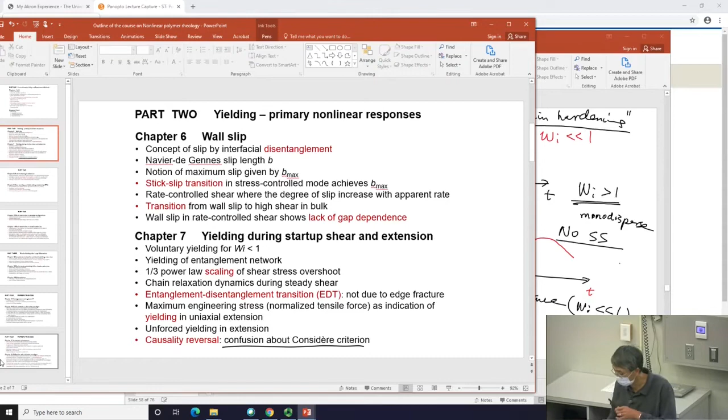So I prepared an outline. If you look at the outline, we finished chapter 7, and we're on chapter 8. There is a section on 7 that I have not spoken about last time, and I should say something about it before, as part of the discussion of extension. And then on chapter 8, we are basically dealing with strain hardening. And today I will speak a little more about the topics of geometrical condensation. In fact, I found a little, or if not little, quite a serious error in the book as I prepared for this part.

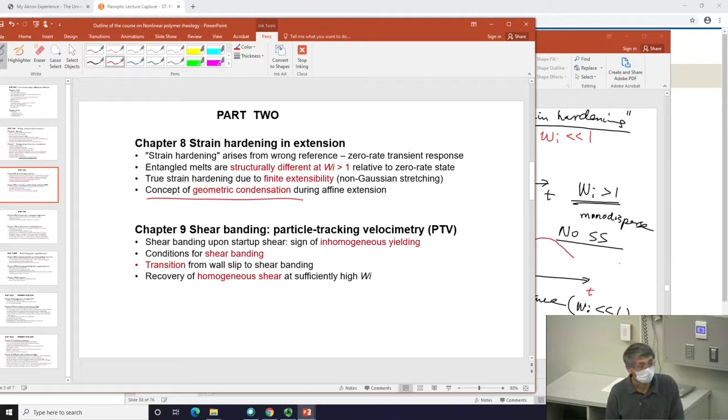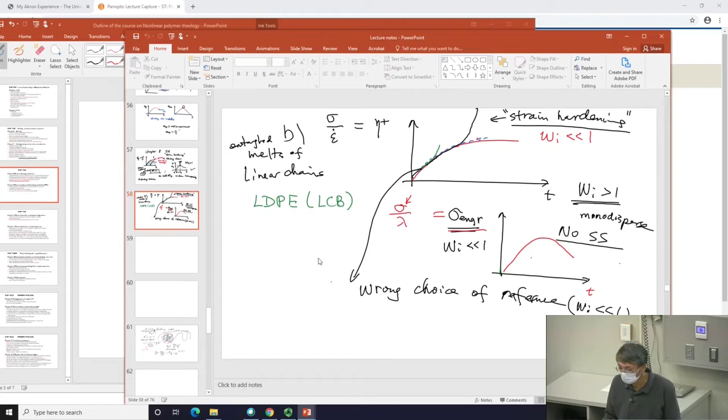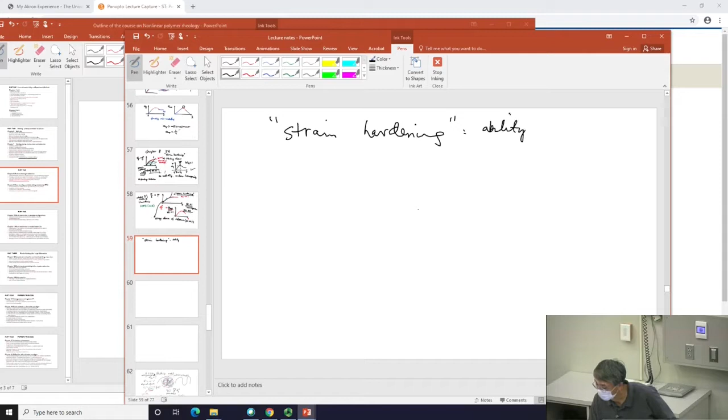I should mention it so that it gets updated. So I have conceptualized the idea about what strain hardening is, by indicating that the reference frame is incorrect, because in the affine case, at least when the sample is affine, the feature of strain hardening that we defined really has a lot to do with whether you still have affine deformation or not. So it really has everything to do with ability to yield or to disentangle. I know that's a molecular concept that we have not talked about yet, but allow me to suggest that the structure we have is entanglement, and the breakdown of the structure is disentanglement in some manner that we have yet to define more precisely.

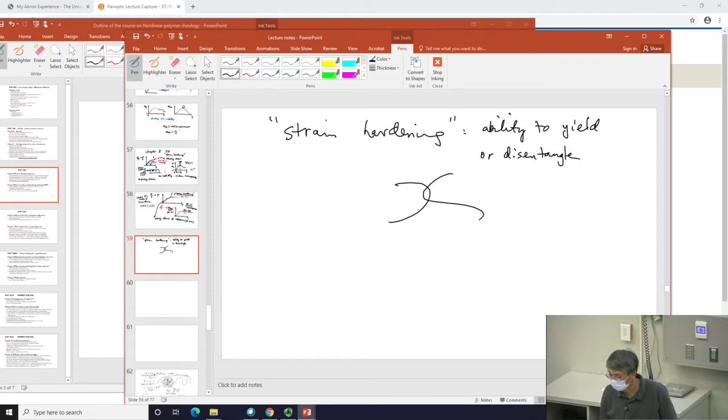So maybe if this is entanglement, disentanglement probably just means that this chain starts to slide relative to the other chain, okay, in the zeroth order, so that they are no longer just grafted onto each other and effective anymore. So that's for much later, but that's the molecular origin of yielding that we will say a lot more about much later.

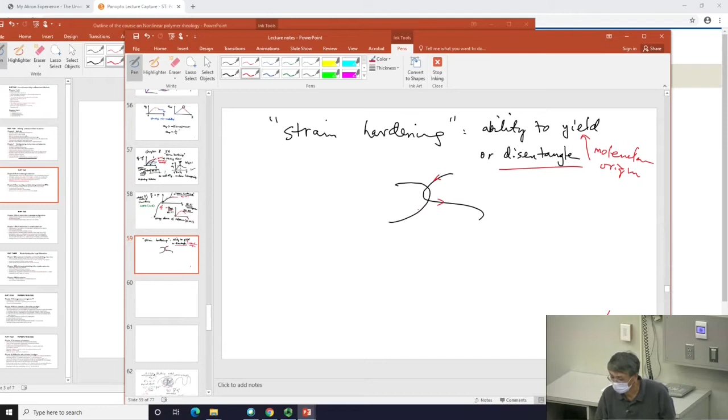So this part of the discussion, of course, is highly unconventional. I'm happy to receive any criticism from the community on this point, or feedback rather. But this is what I had to offer in that part of the discussion.

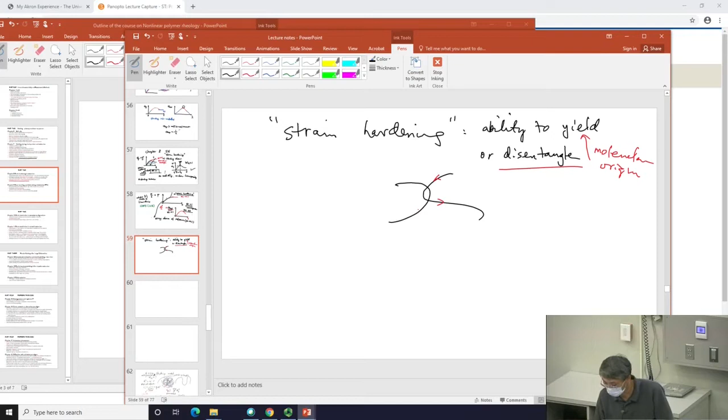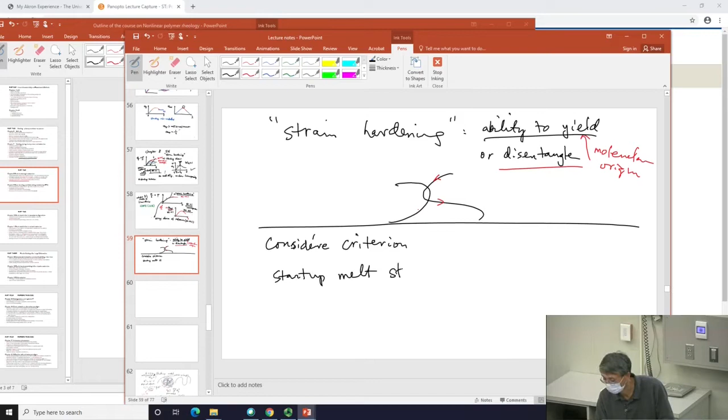So for the sake of completeness, I should say a couple words about the Considère criterion, very much related to the question of ability to yield versus whatnot. And this also gave me a chance to be sure that I was not misunderstood. I said in the last lecture that typically in startup extension or melt stretching, classically or conventionally, we are looking at true stress, or in fact, we very often look at the stress divided by the rate you apply as a function of time. That's what I'm repeating now. You get the zero rate envelope.

I try to change the color, but the computer never can react fast enough. And then you have the so-called strain hardening that I'm reviewing for you. So the signal being above the red zero rate line is called strain hardening, if you still remember, the zero rate limit.

I indicated that this is true simply because your sample is not able to transition quickly enough into a non-affine state, non-affine deformation. When you have affine deformation, then you have this sample being transformed into a state that's very dense in the direction of stretching. So it becomes apple versus orange here. And that's why this reference is not right.

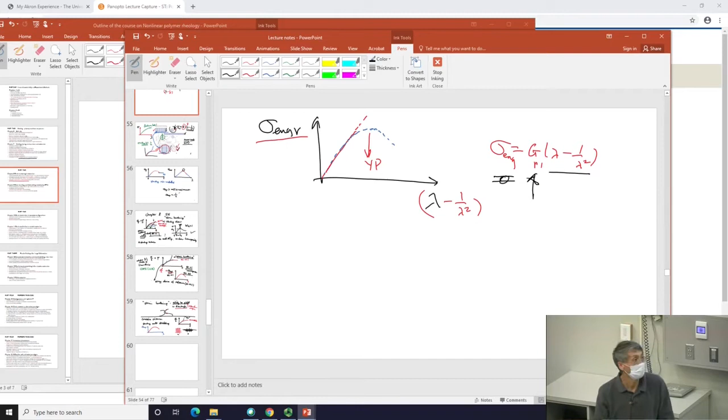There is a subset of literature that does represent your data this way. However, there is some trouble with this representation, in the sense there were discussions about

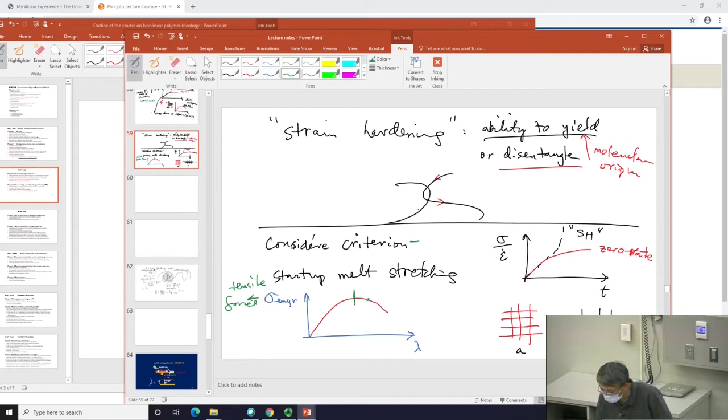the Considère criteria, which is a very old observation of metals. If you stretch a metal, you'll find this is nothing but tensile force, normalized by the area. You find tensile force could reach a maximum, and beyond it, they find the sample will neck. In other words, it will not be uniform anymore.

And this causes a great deal of confusion, in the sense people have used this—there's a person who wrote a paper about metal: beyond the maximum is necking. And polymer people, for polymer solids and for polymer melts, also start to use this criteria and say, oh, if there's a maximum, you should have necking.

And the argument goes as follows. In the past, I have covered this part in polymer physics too, but in the last 2 years, I omitted it. But the argument goes as follows.

If you have a piece of material that inherently shows this red curve, reaching a maximum, then the perception was: if there's any defect—for example, this part being thinner than the rest—then I may argue that for the thin part, the curve will be a little lower. I exaggerated.

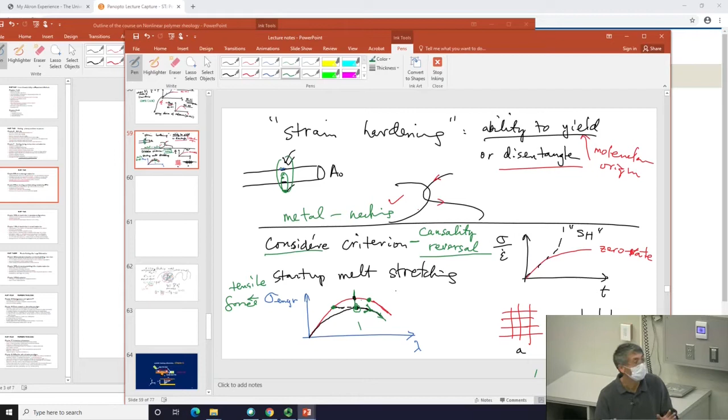In this argument, which is the best of what I could present to you, this is how we argue it. Either this sample is a little thinner, or somehow this sample was somehow weaker for some imperfection reason. One could indeed develop an argument and say this part must thin because other parts will not reach the condition to reach maximum even. So as you draw more, this part will draw more, meaning the black line will draw more, and the sample will go in this direction.

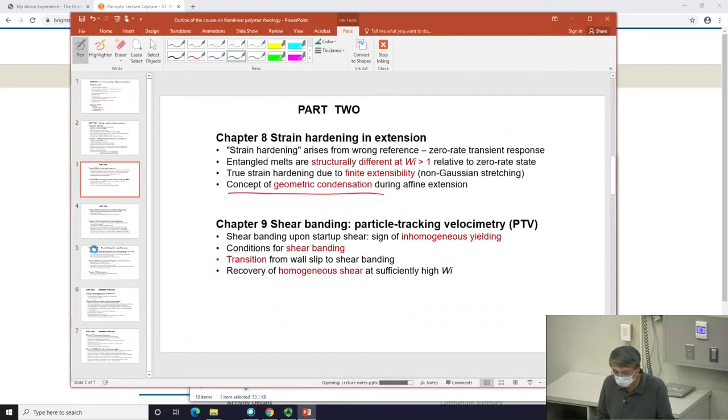Let me close and reopen—the pen isn't pointing in the right direction. So you see this argument says nothing about anything. In fact, it does not say... sorry for this, just a technical issue. It should do well now.

This part of the sample just gets thinner. Remember this curve—this is the direction of increased stretching, right? And this black part, which represents a little section here, will just keep drawing because the rest is stronger. And that's the argument that you have necking. That's the literature argument of it.

What's the problem with this argument is it obviously doesn't tell you—well, if you believe this argument, you will say it sounds like there will be necking. What I can tell you is: where does it neck? Here, here, here, where? It doesn't say anything about it, okay?

What I can tell you is the necking doesn't occur after this maximum at all. There are cases the necking simply does not occur. In other words, you could have a big amount of stretching without ever reaching a condition for yield, for necking. So I call it the causality reversal, in the sense I think the problem we're dealing with first should be to answer what causes this force to decrease.

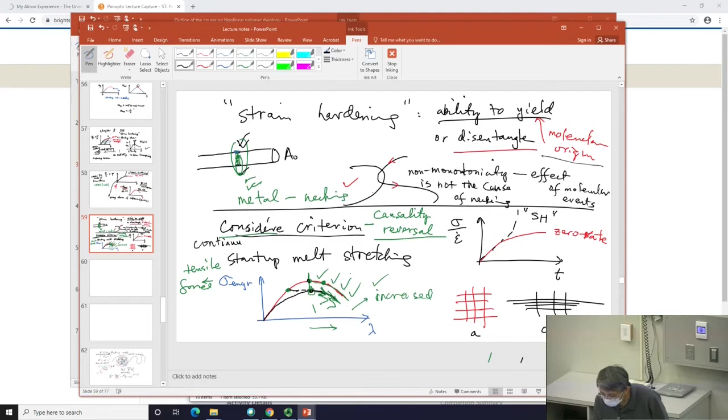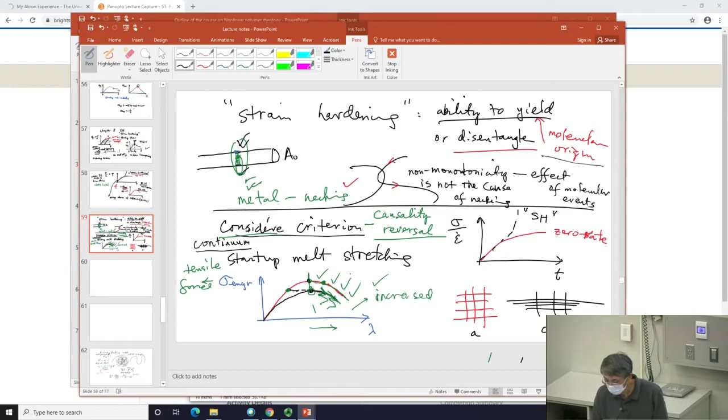At continuum level, you observed non-monotonicity, and you start to claim that this non-monotonicity will produce necking. That's what the whole argument is based on the fact that your sample is unstable against small perturbations—that's the rigorous word to say. Small perturbation meaning the sample is not perfect. Let's say my sample, some part was just slightly thinner than other part.

But this line of thinking is treating an effect as the cause. It is the effect when we are looking at molecular level. When we're looking, instead of continuum level, when we're looking at molecular level, it is there we ask what is causing this force to decline. So the decline is an observed effect. The cause, of course, is at the molecular level.

So my simplest trivial example would be a boy hit a window with a piece of stone and broke the glass. So you see, oh, the window is broken, and you say, oh, the stone broke the glass. Is that fair?

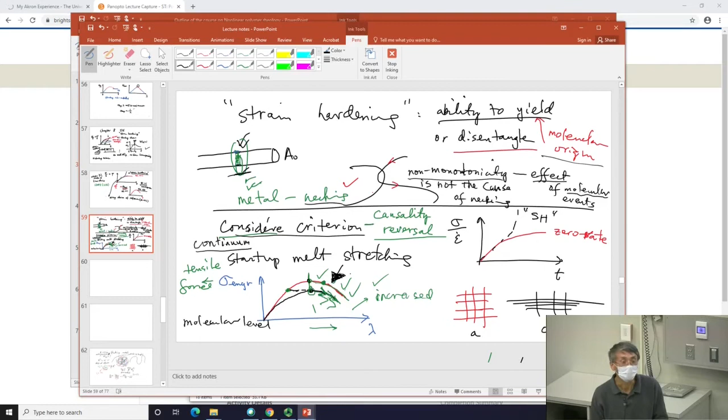Until much later, there could be a condition where eventually necking could occur. But that's a question for us to answer at the next level, at the level that also needs to explain why the force decreases.

In other words, the explanation, the Considère criterion saying there should be necking, offers nothing about why the force is decreasing in the first place. They are using that decreasing as the cause. So I'm just repeating myself now a number of times. Cause and effect is reversed, or I wouldn't call it interchanged, but let's say messed up. Are you with me on this?

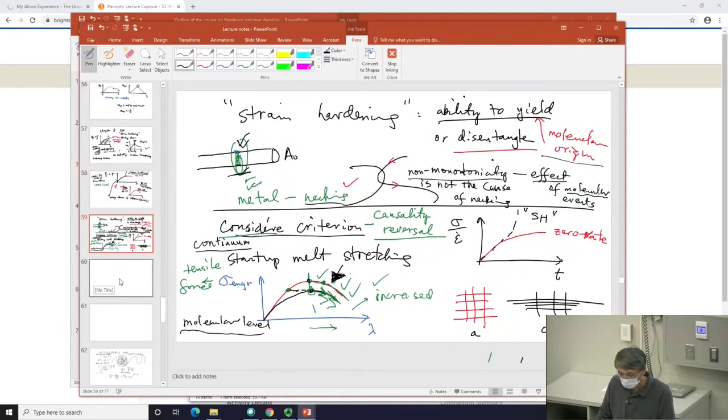Let me think how much better I can say about this. To me, it's beyond a matter of opinion, but we all have our rights to reason. Maybe you can think a little bit and come back and reason with me later on this. Okay, so otherwise, we'll move on.

The chapter 8 is largely done because it was mostly about telling you that the strain hardening needs a quotation mark, in the sense that the reference point is not quite right.

And it's all related to what I told you several times, that in extension, the loading area keeps changing. It's not fixed. This is what produced the apple from orange as I start to stretch. As I start to stretch, I have produced a new structure, if you like. So far we talked about viscoelasticity, we talked about yielding, and yielding is typically about destruction of the structure. Here is sort of like a new concept.

In the limit of affine deformation, which obviously means the structure has not been destroyed, in that limit, we actually also can alter our structure, in a funny sense, because we're using uniaxial extension, for example. This structure, orange, apple, or apple, orange—this structure is already different. These two structures, one is A, one is B.

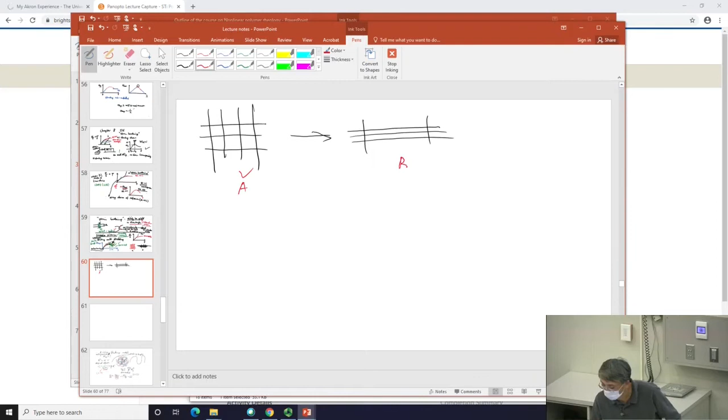When I look at it head-on, from this direction—if you like, from the XY direction—if I look at the XY plane, looking into it, I see a bunch of strands like this. When I look at stretching later, I see a smaller cross-section. I still have these 4 strands. So it's a different structure.

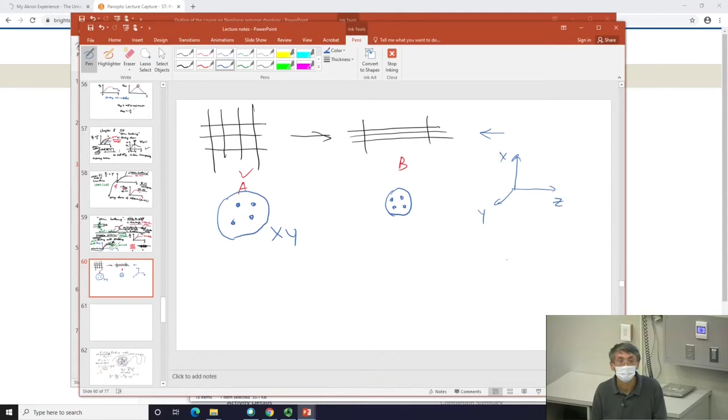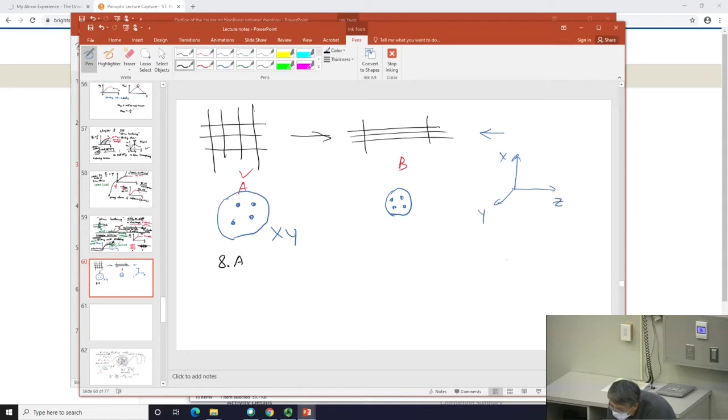That structural difference is enough to produce something like this strain hardening. This is the part I have actually discussed mainly in the appendix called geometrical condensations.

So I will go slowly. Let's consider extension again. In extension, a few things are true that you can pay attention to. For example, if you have a chain that has an end-to-end distance r, then in our discussion, typically this chain is made of a number of Kuhn segments, such that the end-to-end distance squared is the number of Kuhn segments times the Kuhn length squared. Each of these has a little Kuhn length. I know in polymer physics 1 you all covered this, but it's possible to make it up. Basically, this is a Gaussian chain with end-to-end distance like so.

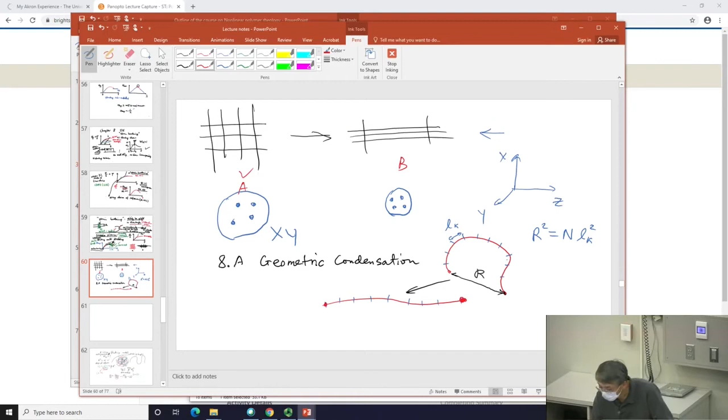Then, of course, if you straighten this chain, you can straighten it in the affine limit. In other words, you hold these two ends and try to stretch until it's straightened. You can ask, how much do you have to stretch to straighten it? Hold the two ends, just try to stretch until it's fully straightened. It's an important concept because we're talking about extension. And you know when it's straightened, it is just a contour length of n times Lk. Lk is the Kuhn length. So it came from initially this state to that state.

So this stretching, the amount it required, is essentially the shape change. Remember, this is all just about shape change. So it's really just L over R. It's just this dimension ratio to that dimension. Just like your R is like your L0. And your L over L0 is what we call lambda, or stretching ratio.

Yeah? Is it all clear? I cannot do anything if this is not clear. Just pretend this is your object. Initially it is L0, and you stretch to lambda star. What is the lambda star that will give me straightened? That's just the ratio of the two lengths. And because of this expression and this expression, it is nothing but R over Lk, or square root of n.

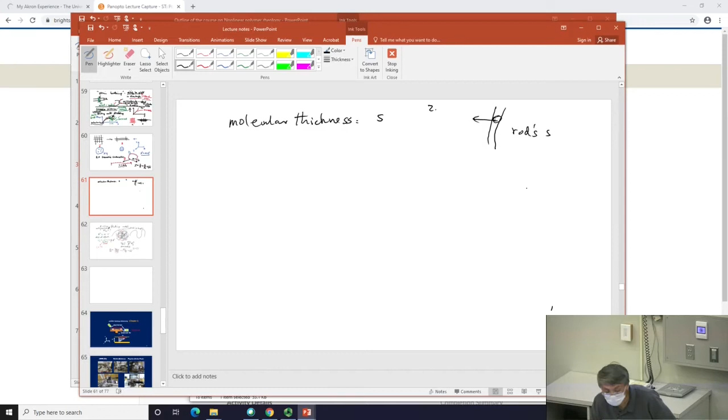A molecular cross-section. If you like to think a chain is a cylinder like this, what is the cross-section here? If I treat this chain as a finite rod, a rod of finite size of cross-section S. This part I will not say too much, you can go back to the book. Basically it's in its formula in chapter 2. It shows that S is

packing length times the Kuhn length. So packing length is something I'm just copying for you. Packing length is something we reviewed. The packing model, we introduced the concept of packing length before. So this is a molecular cross-section

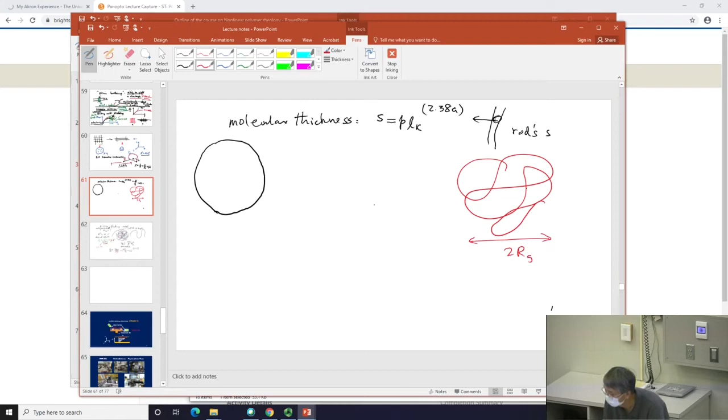of a chain. What we're trying to get is the following story. If you remember, you have a chain which has a size of course, 2Rg. And if you like, that's going to give you an area of pi Rg squared, if I think about cutting across. So we're going to try to figure out something quite detailed about the concept of geometrical consideration, or about the fact the chain generally is coiled.

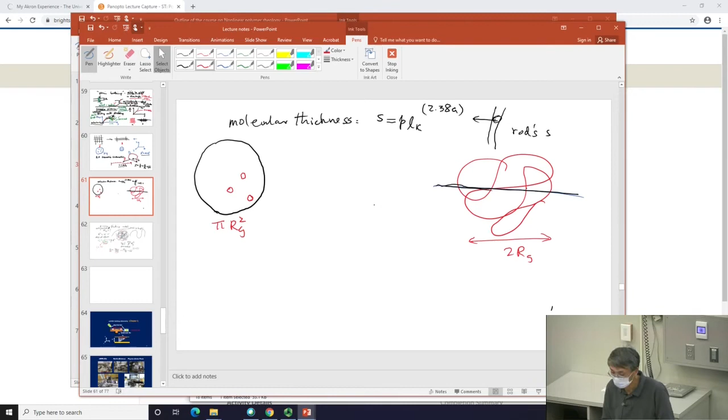Just like here, this chain, although I draw it like a U shape, this chain actually is highly coiled. So what we will first discuss is for you to think about when I cut through and obtain this cross-section, what do I have? Maybe I should use black color because on this side I have black. So that plane, well, you will cut some of the red chains. Because you can see you cut some of the red chains. And there are many other chains, of course. For example, there will be some chains that I represent with a cross. There will be some other chains that I represent with a triangle.

Because in that space there are many chains, not just the red chain, so that it goes to the state of a melt. Each of this has a little area of S. That's what I just indicated to you. I indicated that that's how you have what you have. When we did the packing model, we indicated that in this space of its own pervaded volume, how many other chains are there? How many chains are there? And that is discussed previously when we talked about packing model and discussing this on this page.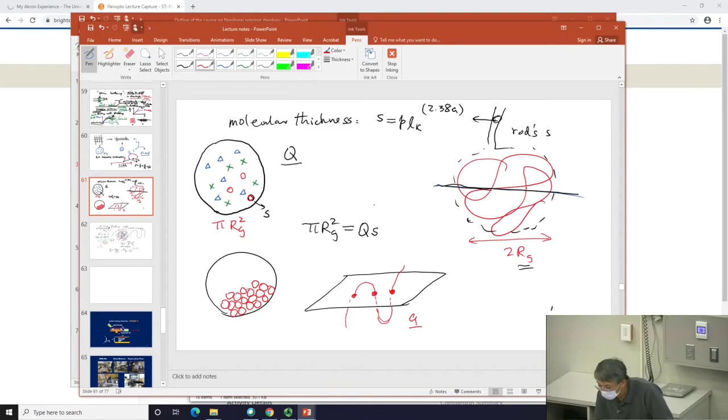If it cut through Q times, each time it occupies S amount. Each chain passes through Q times, each time it passes it occupies S amount, and there are Q number of chains. That will fill up the space or the area. This is the number of chains that I will cut through over an area of pi r g squared.

Each chain folds onto the surface Q times. Each time it folds onto the surface, across the surface, it occupies space of S. This I already told you because it's a function of how long the chain is, that Q. How many chains are in your own pervaded volume depends on how long your chain is. That's the packing model, so this says it's going to be increasing with the square root of the chain length, as in your previous discussion on the packing model. You can always go back to the recording to find out what we talked about, but these are just the results.

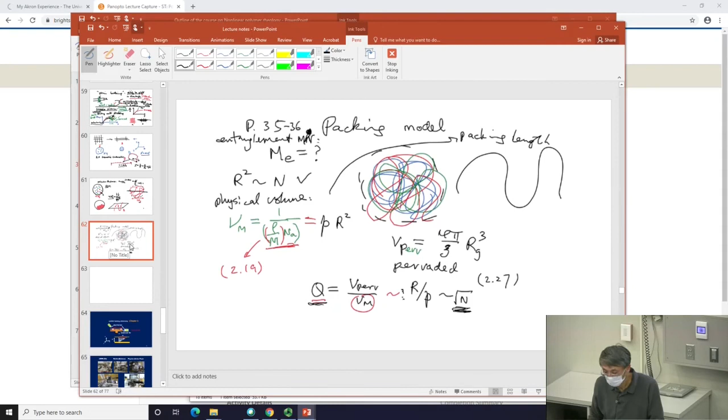So we will find Q number of chains. Each chain will fold an unknown Q number of times. S is known because I told you. So you ask me, what is the Q? Well, this expression derives what is Q. You will find, for example, this Q.

So this Q, by definition, is nothing but pi r g squared over Q S, which is equation 2.39a. So you can write it down in a little more detail, which is 3 quarter square root of 6, r over Kuhn length. So which means Q is also an increasing function of chain length.

Of course, the longer the chain, the more times it will return to the surface, to that given plane. It will fold back and forth, back and forth, back and forth.

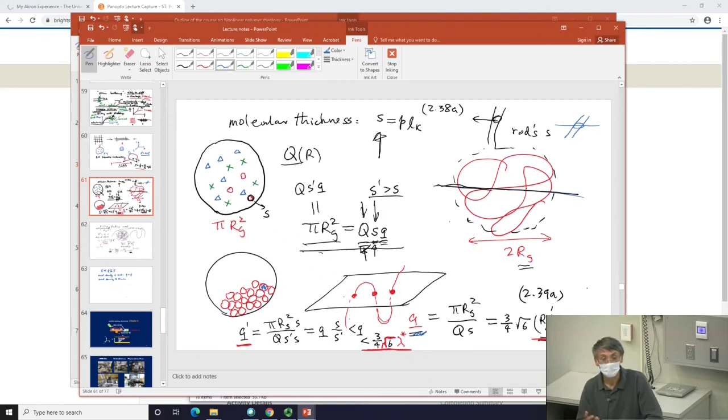I want to introduce another concept called area density of strands, or chains. Basically, you're asking yourself how many chains? I draw a red chain, a triangle chain, a cross chain - 3 chains, but in principle it's any number of chains. So I can ask myself, how many chains are passing through a cross-sectional area defined by my pervaded volume, okay? And that concept is important - it is nothing but the number of chains divided by the area, right?

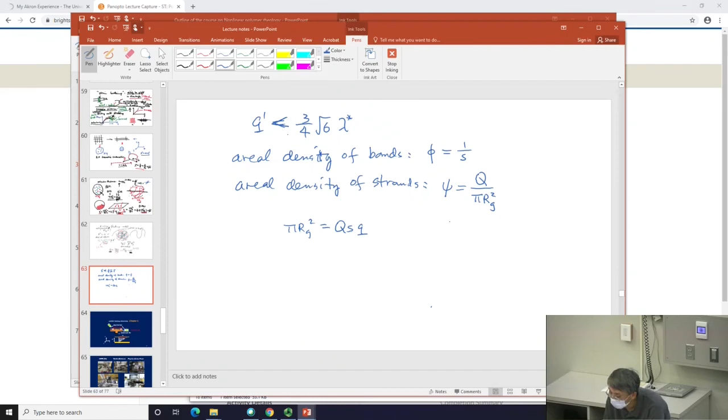So if you have done that, I showed you last time that pi r g squared is Q s small q. You'll find, because of this definition, that this expression becomes 1 equals s psi q. Or, if you like, 1 over q is psi over... gosh, this is called phi, I forgot what this is called in Greek. Psi? Yeah.

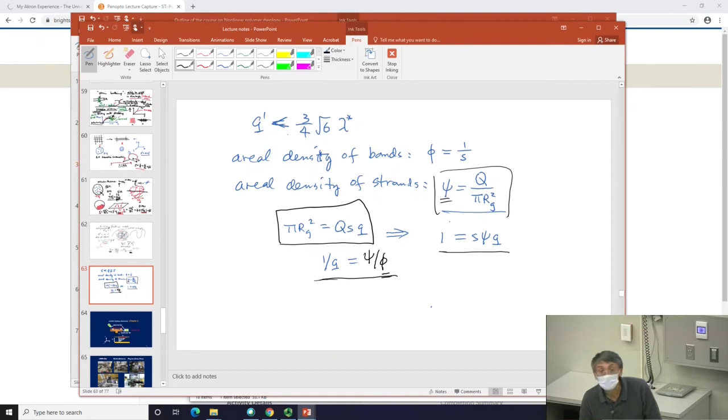So this I motivated you to accept. With this definition, we come up with this, which I rewrite as this. And it says something very, very geometrically profound, okay?

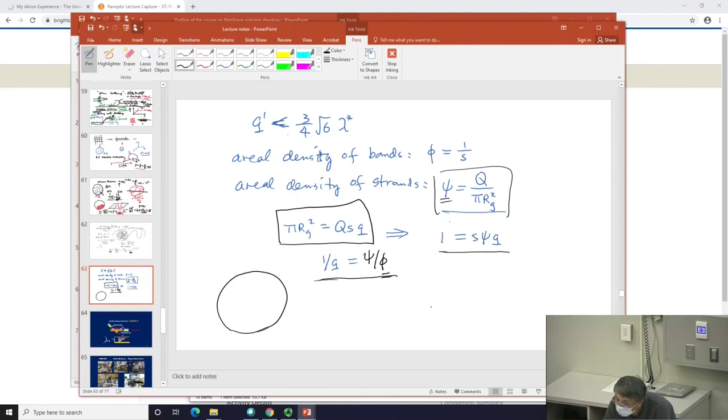Remember what Q means. Q means how many times it folded back onto the surface. So if Q is 4, it means this chain - let me redo it - if Q is 4, it means this strand comes to the surface 4 times. Okay? It comes to the surface 4 times. According to my definition here, I count it as coming through the surface once. According to this definition, it came through 4 times.

So equivalently, it's like this chain has only come through once. Or if you like, if I might borrow this, this would be what I would represent: this chain passed through this area 4 times, but it only is counted as 1 because it is a load-bearing chain.

Do you follow me? So basically, it's a chain like this. It folds back and forth so many times, it wasted all the area in the cross-section without contributing more to the load bearing. I know that's a little bit of a stretch, but think about it - imagine this chain is being stretched so that it has force in this chain, okay? And you will only count this force once, so to speak, yeah? But this chain, the way I draw it here, if you want to draw it differently, this chain actually folded back several times, like this.

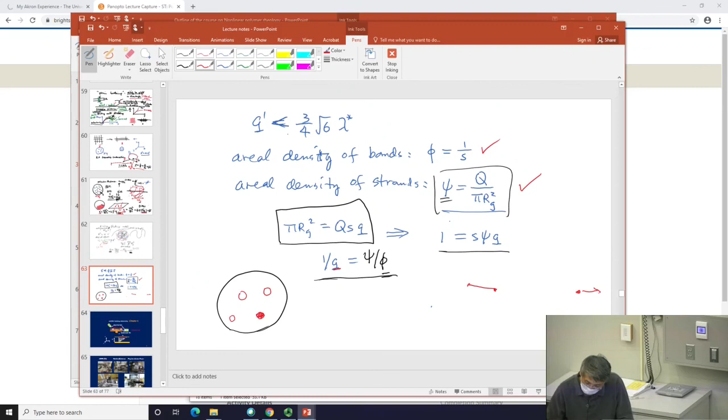Basically, you have a Gaussian coil, and I know when I draw it, I always feel - if this is the direction of stretching, and this is the plane, and if the chain goes back many times, let me use a black color here. If the chain goes back and forth many times, you are wasting all that area. But that's the reality. So if it crosses 4 times, I would say Q is 4. And therefore, the occupancy is a fraction of 25%, if you like.

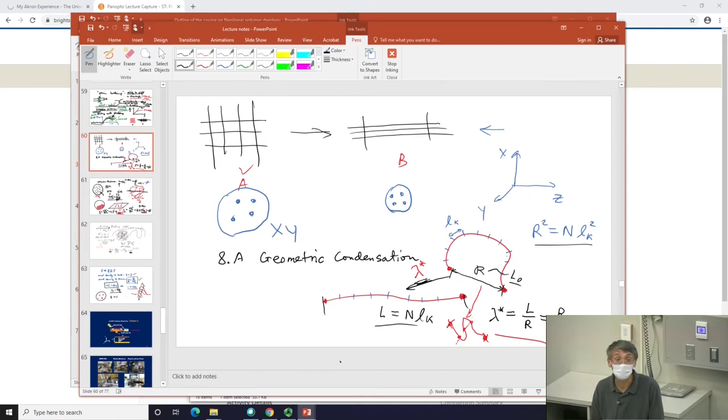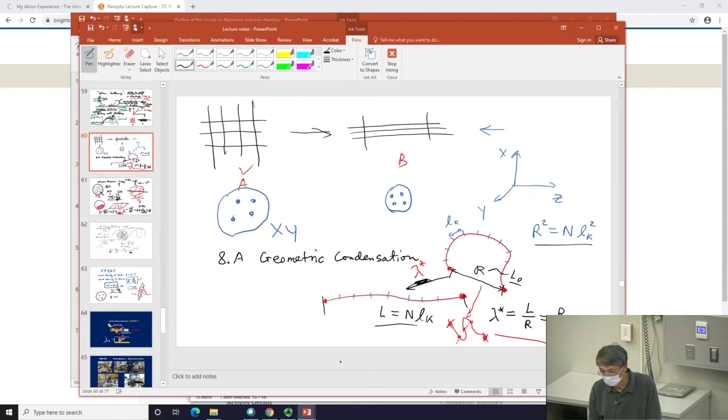I can reduce Q to 1, which means there's no more folding. The chain is fully straightened. We know when it is fully straightened - we describe it here. We need to stretch by a lambda star amount, and it will be straightened. Okay? We're hoping that by the time you stretch your sample by a lambda star amount, your Q will go back to 1. In other words, it will not fold 4 times anymore.

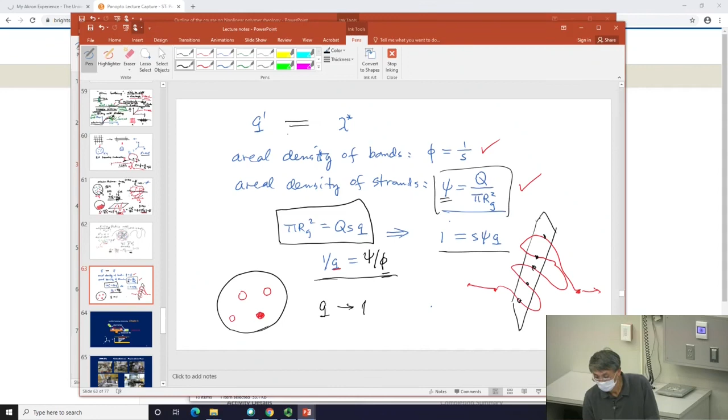Looking at this expression here, or I rewrite it here, if you ignore the inequality sign, if you ignore that numerical factor, in my book I have basically equated these two. How convenient, because that would be nice - you stretch to the lambda star amount, and all the folds go away.